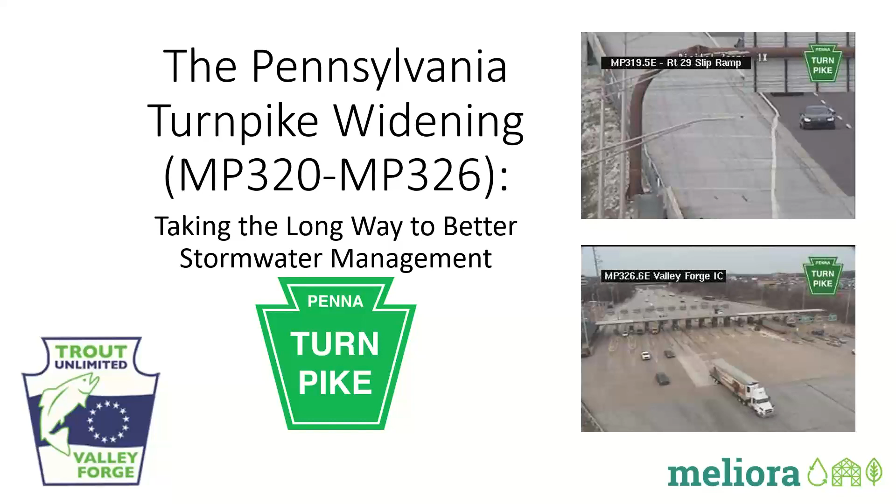Next slide. It's just taking its time.

There it goes. Okay. So the mission of Valley Forge Trout Unlimited is to preserve, protect, and restore streams like Valley Creek. Valley Creek is an exceptional value stream. It is also a Class A wild brown trout fishery. The whole watershed is exceptional value, and all the trout that live in the stream were born there, which makes it pretty special in a fisherman's eye.

I'm doing it too fast. Yeah.

Over the course of the years since our establishment in 1976, Valley Forge Trout Unlimited has helped landowners and developers manage their stormwater. We've advocated for sanitary sewer repairs and upgrades. We've consulted with developers to find good stormwater solutions for their developments and to protect streams where the streams went through developments. We hold an annual cleanup on Valley Creek, and we work closely with Valley Forge National Historical Park to ensure that Valley Creek is as healthy as it can be flowing through that national treasure.

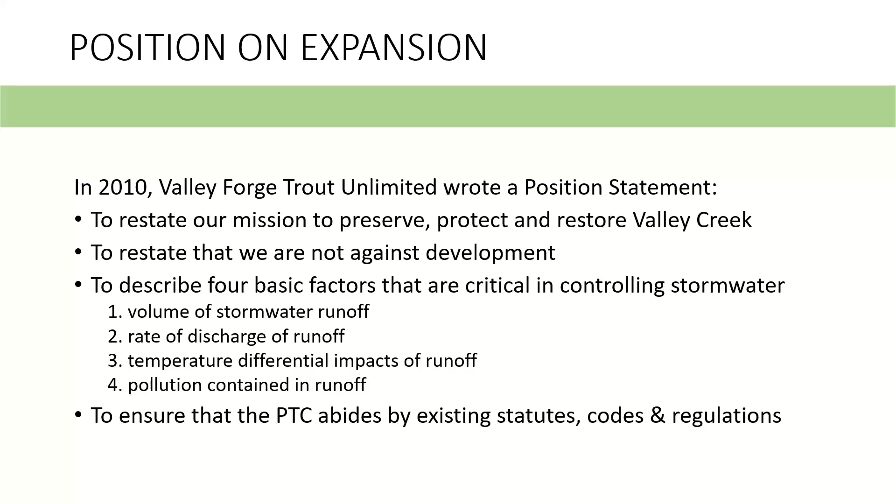In 2010, Valley Forge Trout Unlimited wrote a position statement because we were getting some negative press that we were holding up the progress of this development. And so we wrote the position statement to restate our mission to preserve, protect, and restore Valley Creek, restate that we're not against development, and describe the 4 basic factors that we were looking for in controlling stormwater: controlling the volume of runoff, the rate of discharge of the runoff, the temperature, and the pollution contained in that runoff. And the last thing in the position statement was to ensure that the Turnpike Commission abided by the existing statutes, codes, and regulations.

So we're going to talk about the long discussion to help the Turnpike get their stormwater better on the expanded Turnpike. And this diagram shows the existing Turnpike, which probably everyone has driven. It's 12-foot lanes, 2 lanes in each direction with shoulders and one common median. It's about 10 feet. And there's also areas where trucks and cars can pull off.

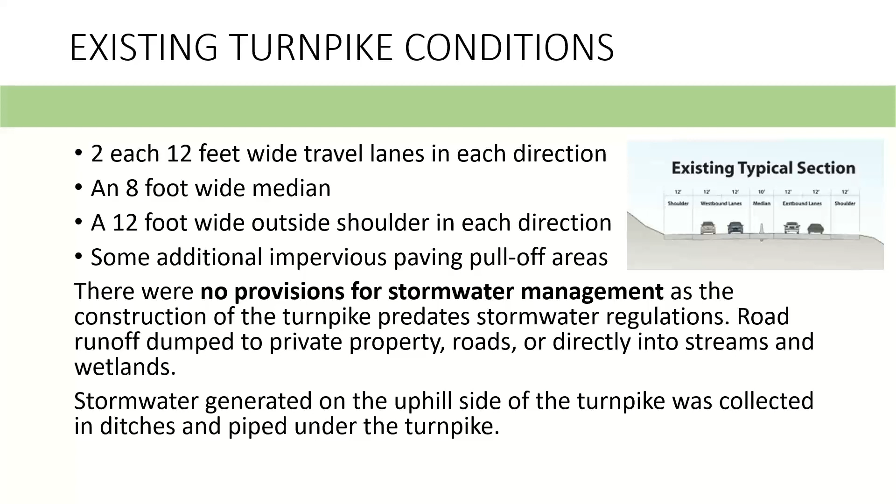Right now, the existing Turnpike has no stormwater management. There's a variety of inlets that just discharge to outfalls that land on private property. Some discharge onto roads, some go right to streams, but none of the existing Turnpike has any stormwater management right now. It's mostly overland dispersed. The widening will significantly increase the size of the Turnpike. Now we'll have 3 12-foot lanes in each direction, a 12-foot shoulder in each direction, and a 12-foot median in each direction.

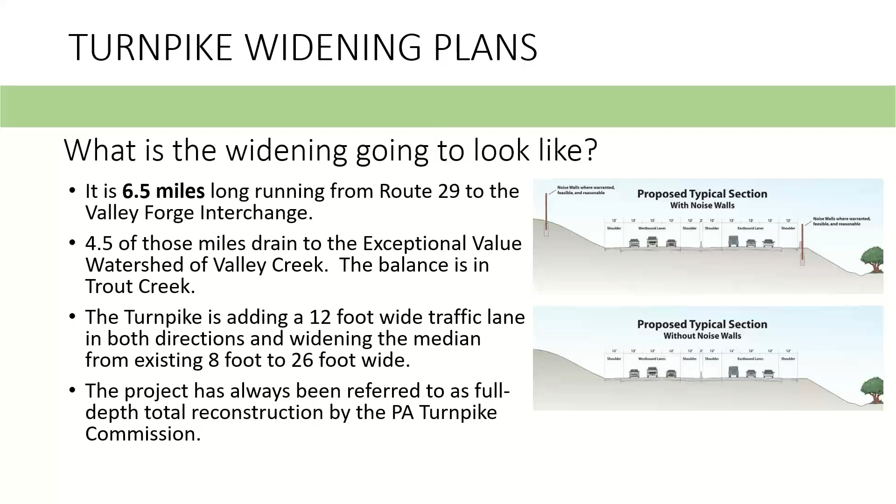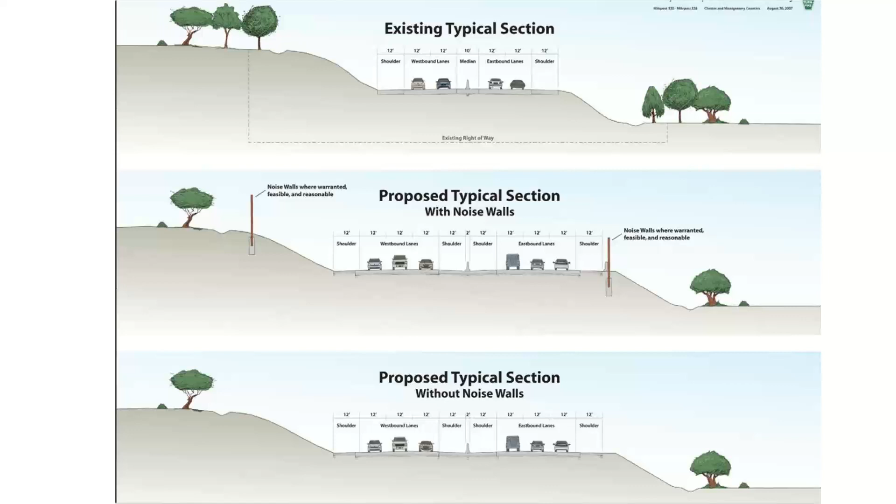The total width will be about 122 feet. So it's a very wide Turnpike. And early on, the Turnpike did not want to engage in any discussions to potentially make this less of a widening. And I know it's hard to see on the computer, but this just blows up the diagram. So in the top, you can see the existing Turnpike, and the lower two are the proposed Turnpike with or without sound walls. A lot of cut and fill, a lot of earthwork required for this project.

This is just a slide explaining the specifics, the berms. So originally the Turnpike was going to meet all the regulations for stormwater management, and they said they would no longer be discharging onto private property or directly into streams and wetlands. But the stormwater that comes uphill of the Turnpike from the north to the south, a lot of water still drains under the Turnpike, and that's going to continue after this project. The project runs across a lot of the headwaters as well, headwater tributaries, as well as the main stem of Valley Creek. It's a long road. It's 122 feet wide for 6.5 miles. That's a lot of impervious.

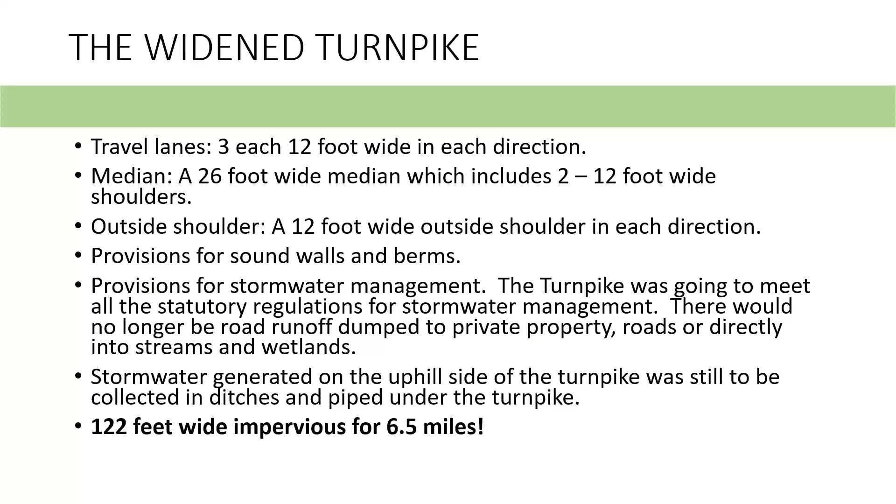And Pete, you want to take this one? So the Turnpike said that they were going to meet all the regulations, but they kept moving the bar on that. I guess when you're as big and involve as much of the state and the politicals in the state, you can kind of manage the regulations a little bit. So originally they were going to treat the Turnpike widening as a redevelopment area, which would mean that they would manage 20% of their impervious as though it were meadow, and that would thus increase their need for stormwater management.

They soon figured out that they didn't have to really do that, that they were considered a linear project and an infrastructure project of the state, and subject to Chapter 102.8(g)(2)(ii), they were exempt from having to manage the stormwater on the existing impervious, even though it was going to be totally reconstructed and potentially even relocated from its original position. So there was no plan for management of runoff from existing impervious. It was a very generous interpretation of redevelopment in favor of the Turnpike.

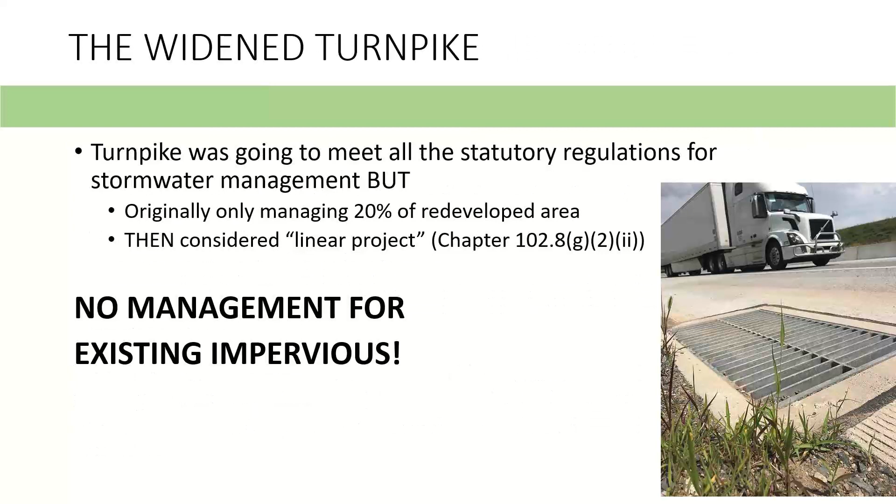The other thing I love about that last slide is that super clean inlet. I don't know if you've ever noticed an inlet along the Turnpike, but I've never seen one that clean in my life.

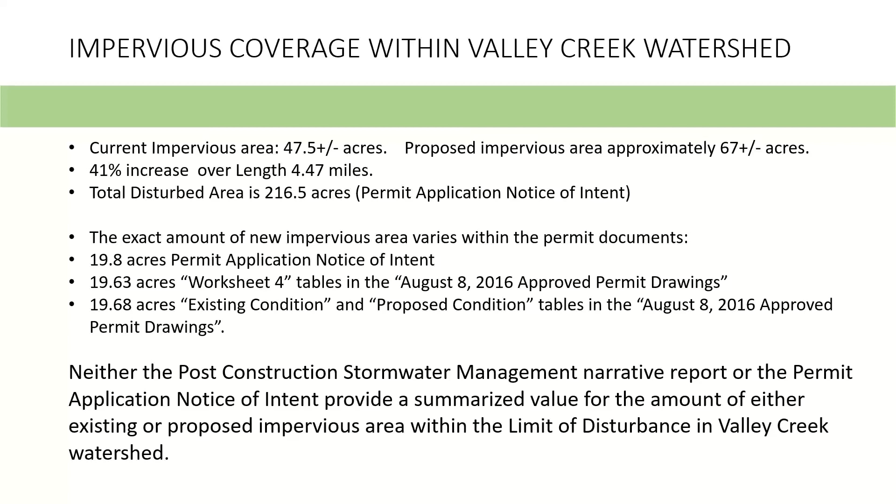One of the things that came up, a lot of numbers here, but one of the things we really struggled with is there were so many documents and permit application files, and the numbers were never the same. So it was somewhere around 19.8 acres of new impervious associated with the Turnpike expansion, but depending on whether you looked on the drawings or worksheets or permit applications, it seemed even the Turnpike couldn't get their numbers right, which did not give us much confidence. And within Valley Creek, there would be 4.47 miles of widening, which would be an increase of about 41% on a total of impervious area, and 216 acres total, which is a big project. Yes, significant. A lot of additional impervious, and the way they were calculating that was questionable from a lot of different angles.

So our timeline actually starts a little ahead of this timeline. In 2005, I had some initial meetings with the Great Valley Association, who was concerned with the widening, and they had gotten wind of the project because of people in their backyards taking measurements and doing geotesting and that kind of thing. The Great Valley Association is a local community association in Tredyffrin; a number of their members had residences along the Turnpike, and so they were concerned and set up a Turnpike subcommittee, with two pieces, one for sound walls and one for stormwater runoff. I was involved with the stormwater runoff committee.

Eventually, it made it to Valley Forge National Park, and Deirdre Gibson, who was chief of planning at the time, called a meeting with all the stakeholders. She was concerned about the Turnpike and additional runoff and the impacts as it would go through the roughly 2 miles that abutted Valley Forge National Park.

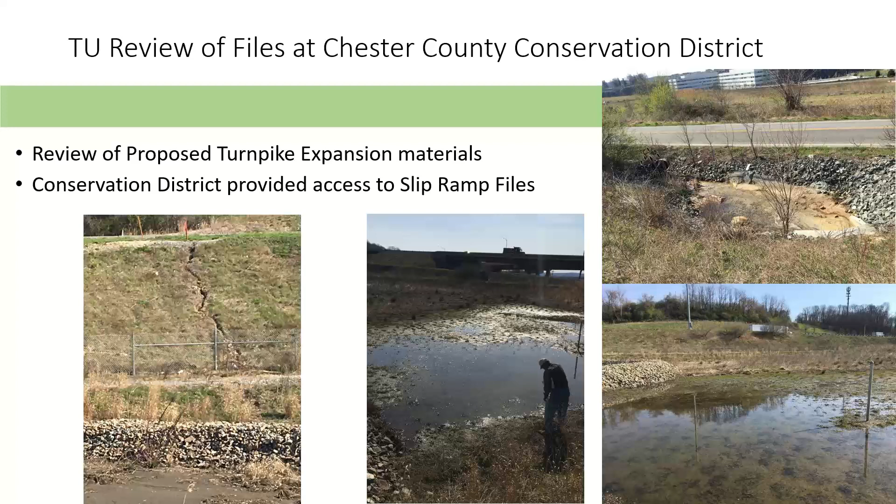So this sort of gave us evidence that we could not trust the turnpike and their designers to develop a stormwater system that was going to actually do what they were promising. So back to the NPDES application for the expansion. Yeah, there's a lot of problems with that. The land use types were inappropriate. Land use types were used for the runoff coefficients.

Oh, come on, Pete, shopping center's a forest, right? Anyways. Well, yeah, I mean, we had one section that was listed as forest in good condition, which was actually a mowed edge of the turnpike, and it was kind of crazy. Lots of math errors, as we had pointed out earlier.

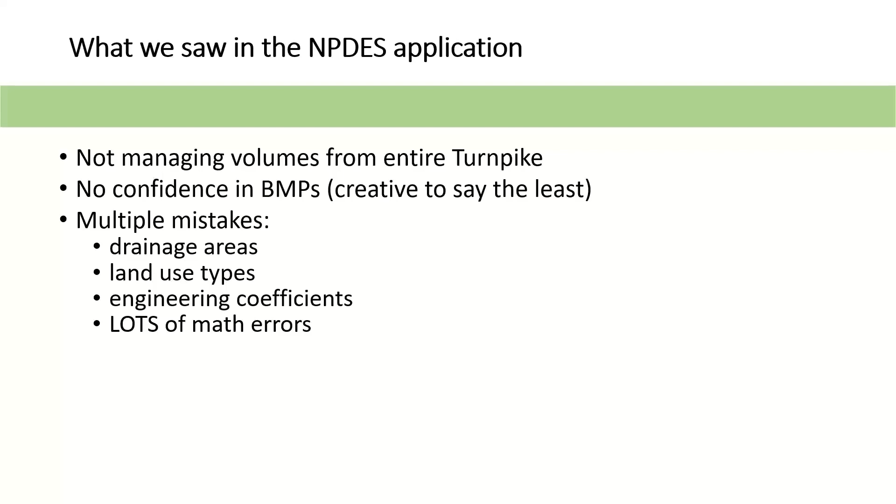It depended on where you looked in the charts and in the information that STV had provided, what kind of numbers you came up with. They couldn't even keep the total numbers of the impervious consistent across the various documents they needed to submit to DEP. And we certainly had no confidence in their BMPs with the failures at the slip ramps. Yeah. So yeah.

In 2017, we're pushing along now. We've been in the appeal of the NPDES permit for longer than a year. We've gone through discovery. We're talking about what it might look like when we win this. Might it be better if we pursue a settlement agreement? And Frank Donahoe, my compatriot in crime at Trout Unlimited, who attended a lot of our meetings, a lot of the roundtable meetings, he came up with the idea that it might be a good time to maybe change tactics.

And we talked about this with Michele and John Wilmer and said, might we be able to not battle the footprint, but to improve the BMPs within the footprint, not do an entire redesign, but to redesign the BMPs so that they actually function, and that we needed to remember our ultimate goal here was to end up with a project that's going to protect Valley Creek from the runoff of the entire turnpike and infiltrate that stormwater that the project would create and then capture and discharge it to groundwater either through infiltration or slow release.

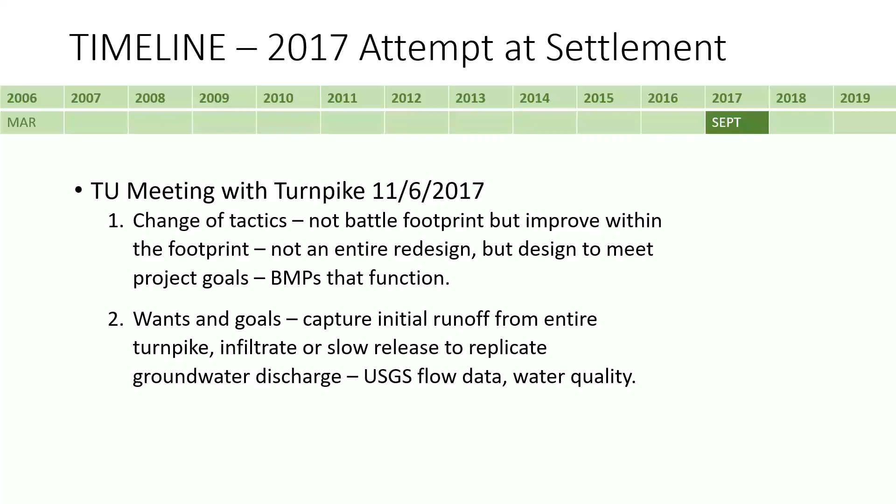So anyway, we contacted the Turnpike Commission, the project manager, Kevin Shurek, and proposed this to him, proposed a meeting, and that meeting was held in November of 2017.

And to discuss the things that I just had mentioned. You threw all the lawyers out. Yes. On both sides. That was actually maybe the part that sealed the deal for the Turnpike, the fact that there wouldn't be any lawyers at the technical meetings where we would discuss how to improve the BMPs that were designed.

So we had 4 technical meetings. I think we had a meeting in November. I know we had one in December and January. But we had at least 4 leading up to the Valentine's Day meeting in 2018, where the attorneys joined us, and we had a big room at the Turnpike building over in Plymouth Meeting, and there was a cast of what seemed like 1,000, but it was probably less than 30, but more than 20.

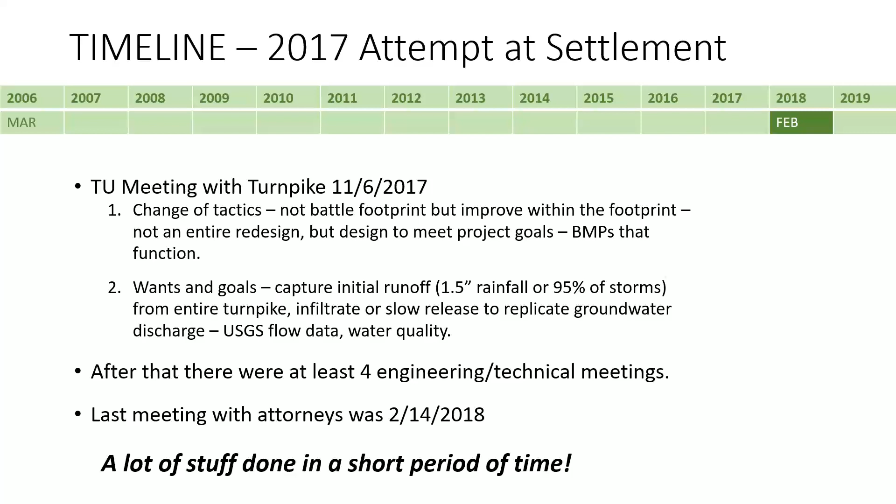Lots of lawyers, a few engineers, other staff, and it was a long meeting, but the outcome was that the attorneys agreed to work on a settlement agreement. That settlement agreement, the last entry I find in my notes, had 12 iterations. It went on for months, just the settlement agreement. And we had not yet finished our technical meetings. There were still a few things to work out. I think we still had a soil specification to hammer out, though we were well on the way with that.

So here's a list of who was there for the technical meetings. For every meeting, there was a member of the Turnpike Commission. That was Kevin Shurek. He attended every meeting with Scott Brown from NTM, who was their stormwater consultant. I believe Frank and I attended all the meetings, as well as Michele, and Clay Emerson was hired from Princeton Hydro by the National Parks Conservation Association. Some of the meetings were attended by DEP, Anna Damarou and Christopher Smith, Steve Burgo and his consultant, Dan from E.B. Walsh.

Dan Walsh, right. From E.B. Walsh. Yeah. Dan. Forget Dan's last name. No, it wasn't. No, different Dan. Different Dan.

Okay. Anyway, Amanda John from National Parks Conservation Association, I believe, was there for at least one meeting. Could I just add that when we had these technical meetings, Kevin Shurek, the engineer from the Turnpike, not the consultants, came to them fully engaged and looking to find solutions. When you had the technical people in the room, it was productive, everyone was engaged. These meetings were extremely productive.

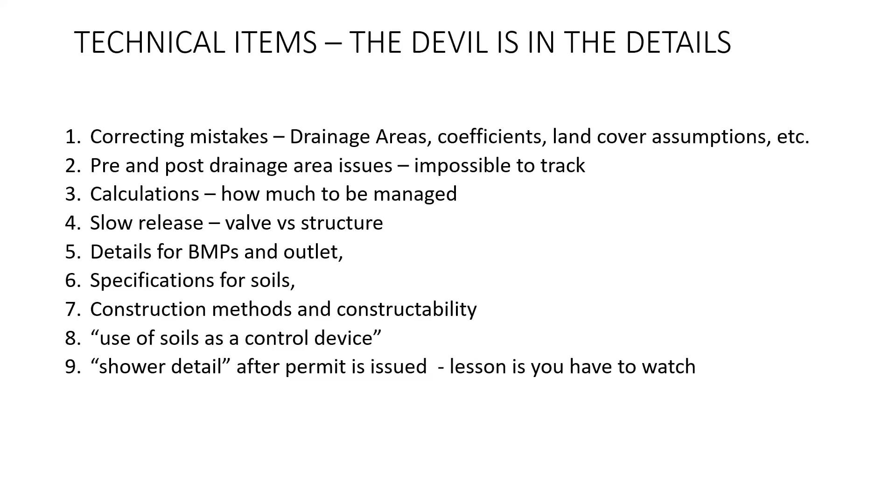We had a lot of discussion about that, but still when the final drawings came back, the detail documented was essentially like a shower head that would let all the water out in a big spray. They continued the perforated pipe from the filter side of the box into the discharge outfall, and it would have been a shower head, letting all the water out.

A lot of discussion about the soils. We argued pretty strongly that if they were going to use bioretention, it was an engineered system, and the soils were engineered no different than asphalt or concrete is engineered. So you need strong specifications and testing and construction, and you can't just use whatever you've got.

We talked about the state of Maryland soil specifications, and so a lot of the failure we saw at the slip ramp was due to soil problems. So a lot of discussion and finally specifications that the soils are essentially an engineered material with very few fines. It's a combination of sand and compost, essentially.

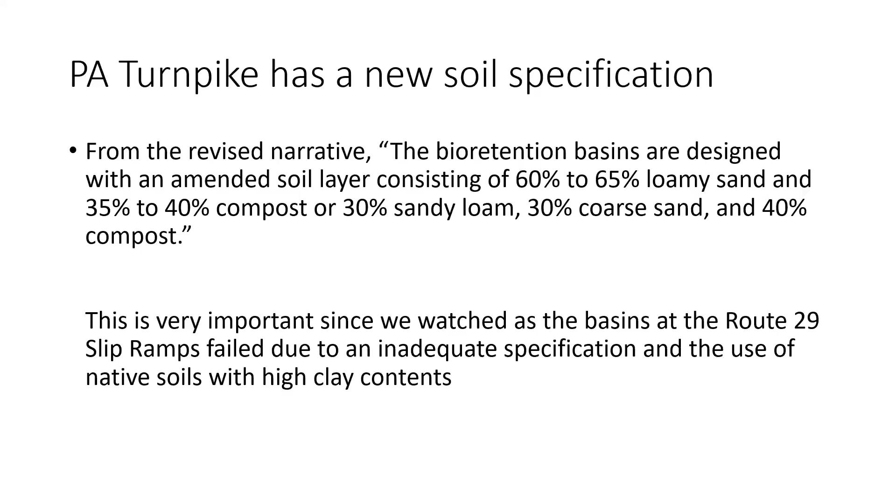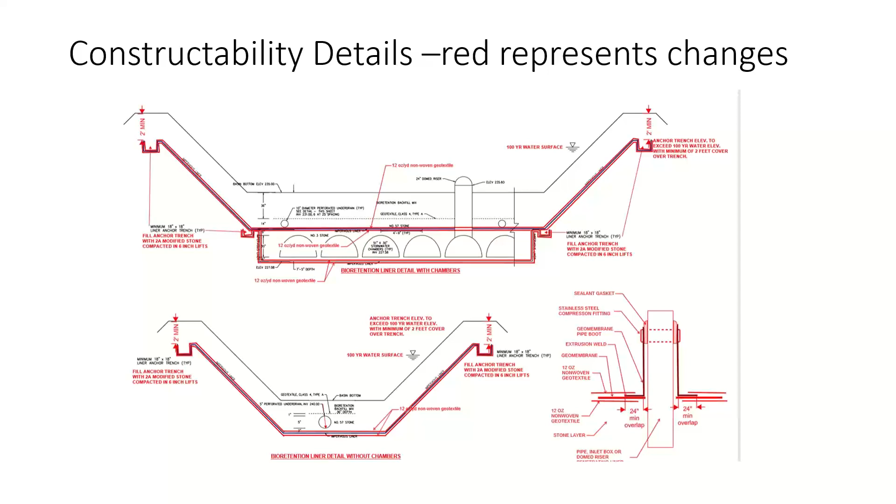Yes. In addition to the bioretention area, there's several areas where the Turnpike's only stormwater management was the sediment vortex boxes, the concrete vortex boxes, and then the water would go to large underground vaults. I think you pointed out this one's like 252 feet long, right. Huge underground vaults to be released.

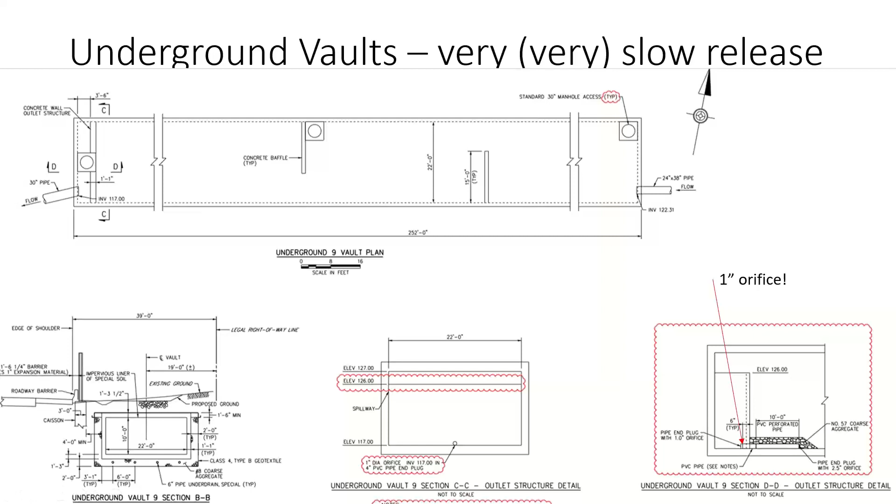And so for these vaults, we pushed that, again, the water would, in the small frequent storms, discharge more like a little garden hose dribble, that it would be more of a mimic of groundwater than a detention basin type of release, and that was really important, and that the temperature was also very important.

Lessons learned. So yeah, we learned a lot of lessons over time. You can't expect to get anything done quickly when dealing with a governmental or quasi-governmental agency. Obviously, the Turnpike was that agency, and getting anything out of them took a long time. They, on the other hand, pushed us aggressively on schedules every time they wanted something from us. So it was kind of a one-way street, but it takes a long time to get anything changed through the Turnpike or through their engineers. Sometimes longer through their engineers.

You can't be assured that the rules, codes, and laws will be fully enforced when dealing with an entity such as the Turnpike. Obviously, we had the settlement agreement that the Turnpike entered into with Tredyffrin. We saw the way that they were able to get around some of the state regulations. So be sure of what you're trying to accomplish and never lose sight of that ultimate goal, because sometimes the rules change as you're playing the game. You must make sure what they design will work and can be built.